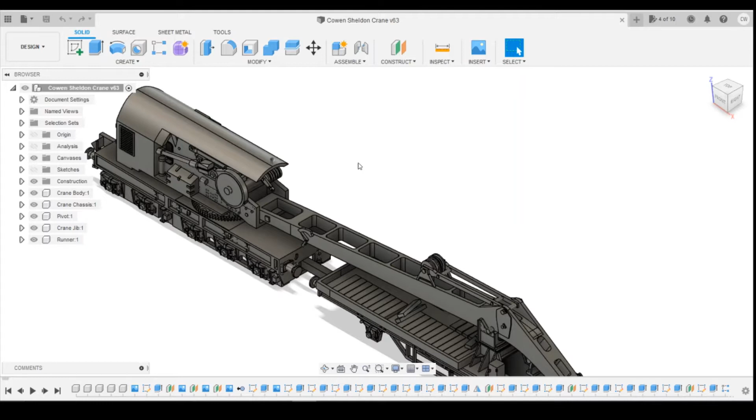In today's lesson we're almost there with the crane now. What I'm going to be doing is just going around and looking for bits of detail that I can improve, some changes that I want to make, just anything that's going to be taking this model that little bit further, that couple extra percentage to looking a little bit nicer. So the video is going to be a little bit bitty, jumping around between different items I see on photos and changes I want to make. Hopefully you can keep up with it, but if you can't, just go back and skip through the video and fix those pieces that you find are different.

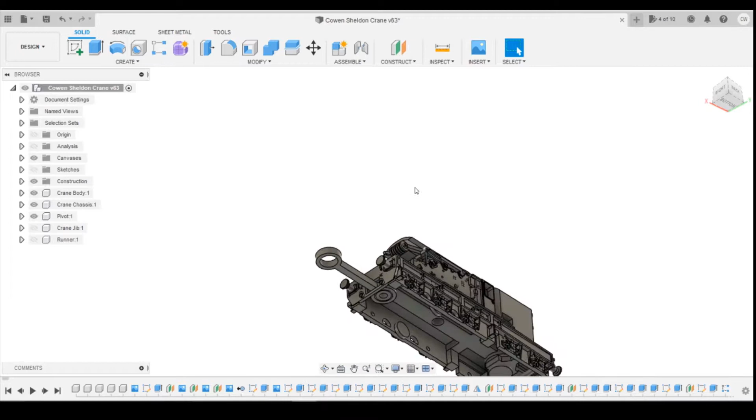Okay, so the first thing I'm going to be fixing is something I spotted when I'd finished the last video, that I needed to make a change to this coupling area. Let's make the runner and the jib disappear here. My intention was to pass this coupling bar through the hole and then over the spindle, but as you can see, the circle at the end is bigger than the hole, so that isn't going to work. I can't make it any wider because I'd lose the detail of the two shackles coming down the side. So the obvious answer is just extruding this bottom piece all the way out, and then you can slide the coupling up and down inside the model.

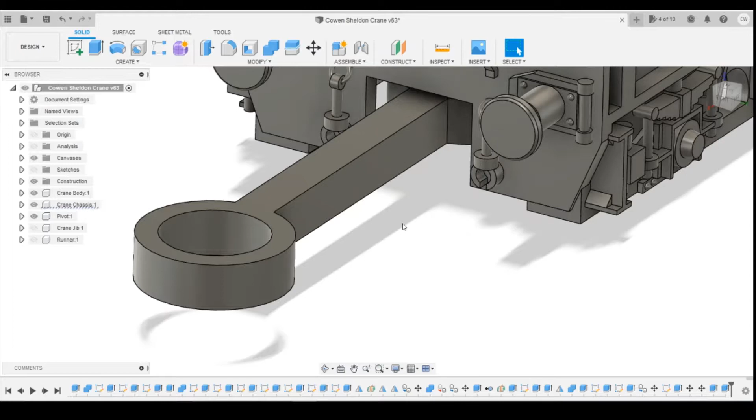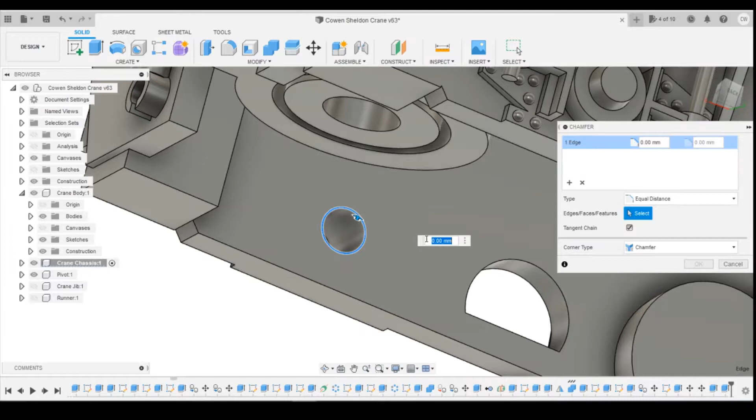Okay, so the next change I wanted to make was in and around the pinpoint holes for the chassis. What I wanted to do was just chamfer off the edge a little bit to make it a little bit more easy for the pinpoint to sit inside it. Let's try 1.2, hopefully that'll work, and that'll give those a little bit more room for the pinpoint to sit in there. I'm just going to take these in 0.2 millimeters.

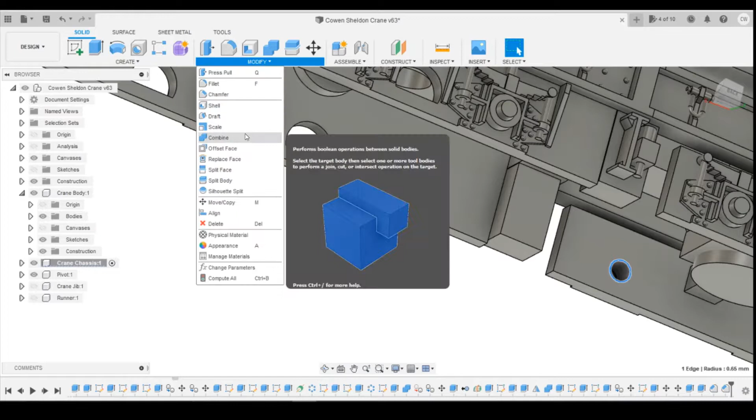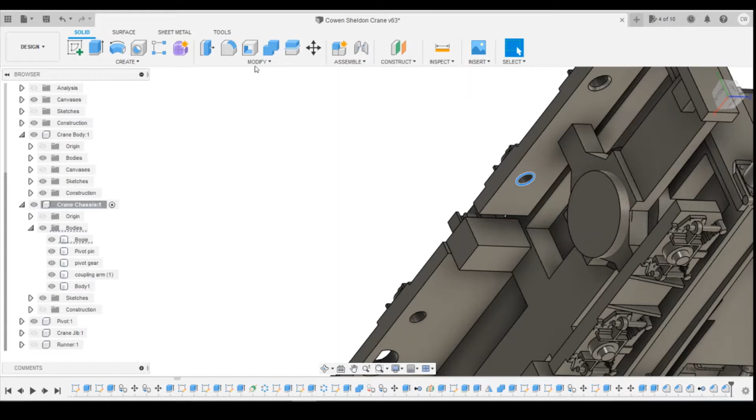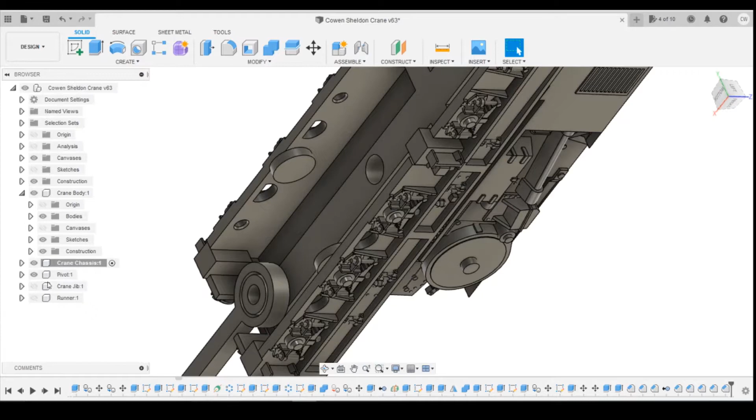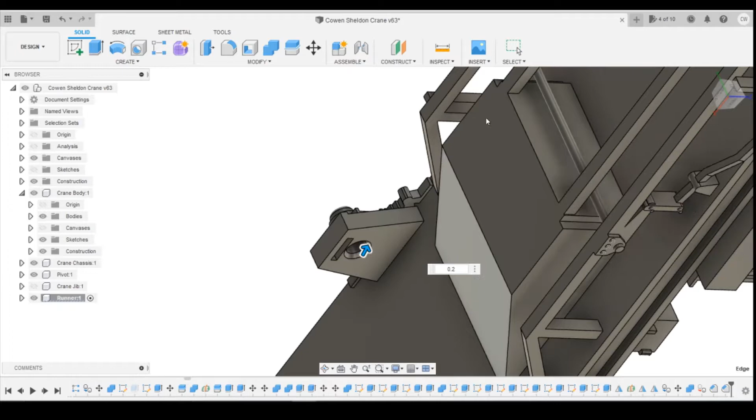Obviously I'm making sure I've got the radio button checked here. Let's get rid of that body here, we don't need that anymore. Okay, so that's chassis done. Let's do the runner next. So selecting that on the radio button, just doing the same thing here. So that's all of the axle boxes chamfered in - it'll give the pinpoint just that little bit more freedom where it comes down at an angle.

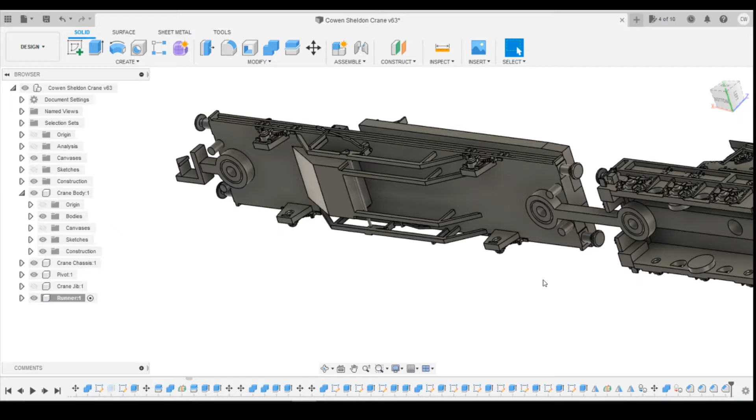Okay, so next thing I'm going to look at is on the roof of the crane here, there's what looks like an exhaust on this side and something similar on the other side. Maybe it's a filler cap or something, but both of them may be exhausts. So I'm going to be looking at drawing those two within the crane body. We'll select that radio button for the body. Okay, so let's have a look - whereabouts is it located? We're going to be using offset planes for this. So that's probably up here somewhere. Just turn the chassis off so it can come underneath.

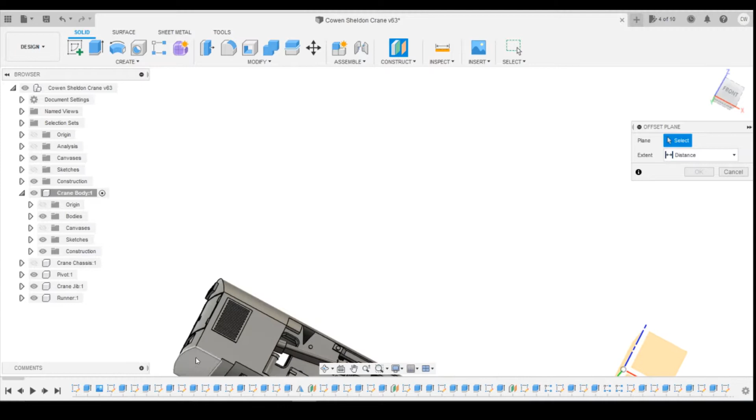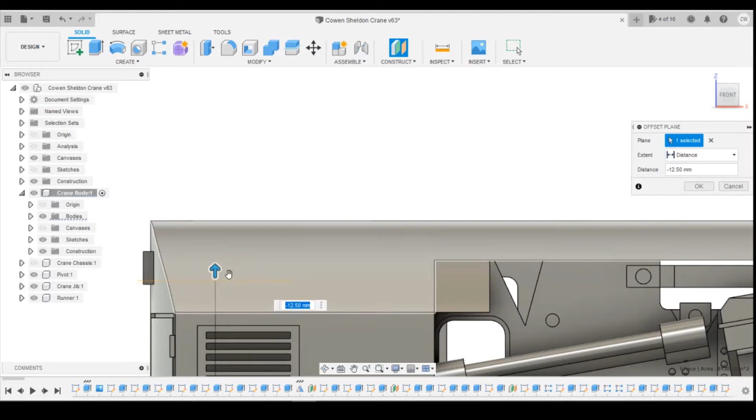We're going to create an offset plane from the bottom surface there. I'm going to bring that up so that it's roughly whereabouts I want it. If you look at the picture, the bottom of this looks like it's below the bottom of the roof line here, so maybe just come down just a fraction - yeah, 12.5 millimeters. And then we're going to draw a sketch on that surface. Let's look at the location relative to this vent - it's pretty much sort of in the middle of it. And the height across the roof, okay, so somewhere in this area here.

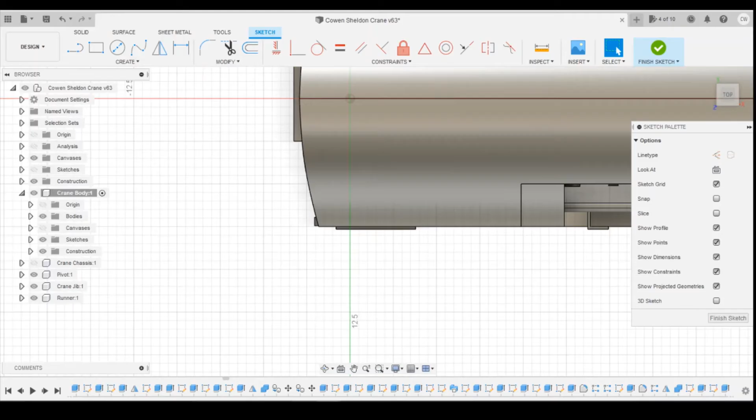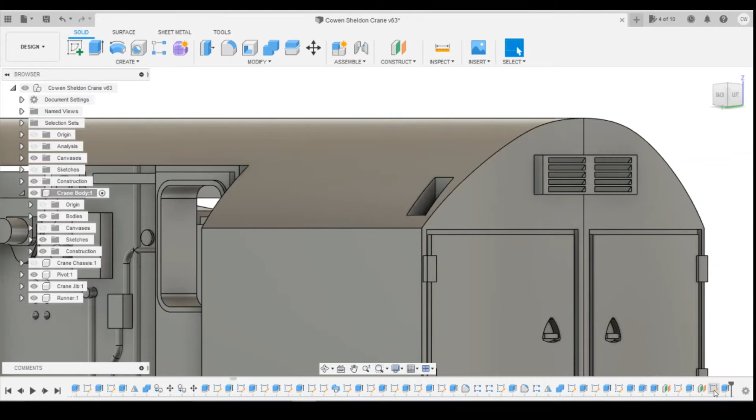So it's going to be using centre point rectangle, I think. Yeah, so maybe going for 1.6 by 2 millimeters. That looks okay as it is there. Let's just define that. 8.25. Too close to do that one - let's try something else.

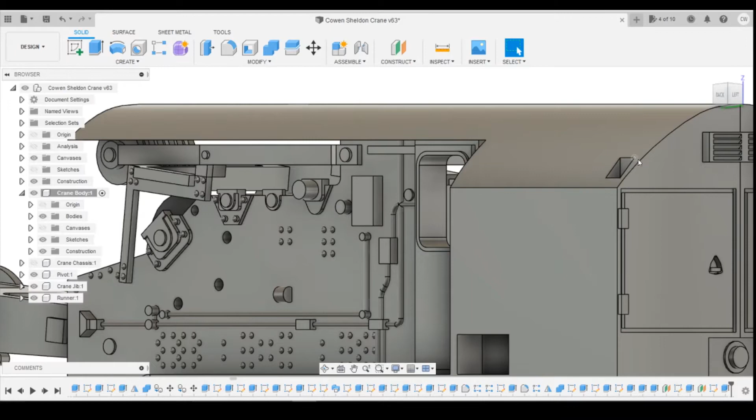And then hover over the top of the square I've just drawn, hold the left mouse button down, it brings up this pop-up. Just scroll down until we get the profile selected, and then right click, extrude, and we can just drag that up. Hopefully that doesn't go all the way through - which it does. So how are we going to fill this in? Well, the obvious answer isn't always the easy one, unfortunately.

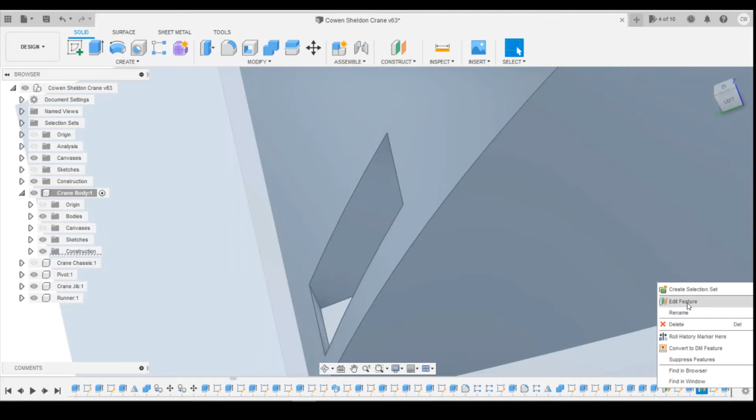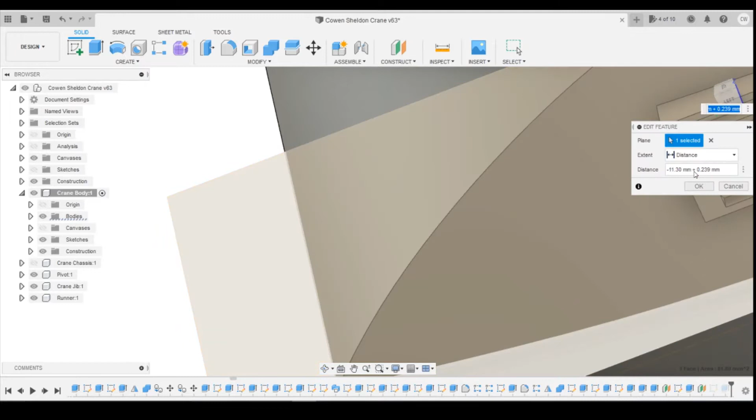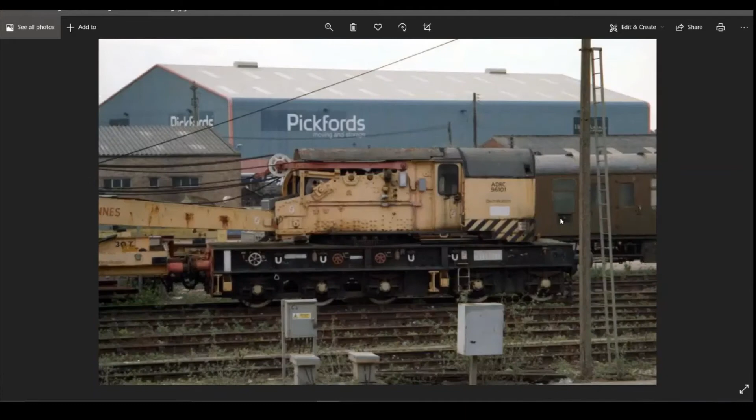Interesting, how am I going to fill that in? First of all, is there that step? Probably going to be flush. So first thing is probably need to bring the offset plane up slightly so it doesn't step down in here. If we look at what that step is, it's 0.239. So if we bring this up, we don't have that step in there now.

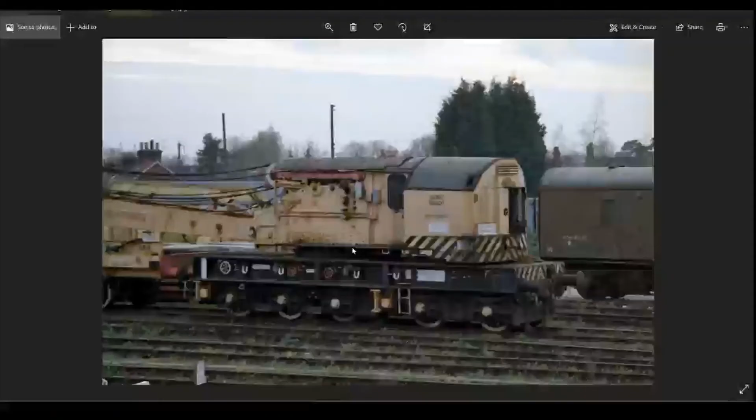Okay, so what I think we're going to have to do is draw a sketch on there. Let's slice that. And we'll draw a rectangle to fill that gap in there. Just drag that back 0.4 millimeters to join. Do the same on all these sides.

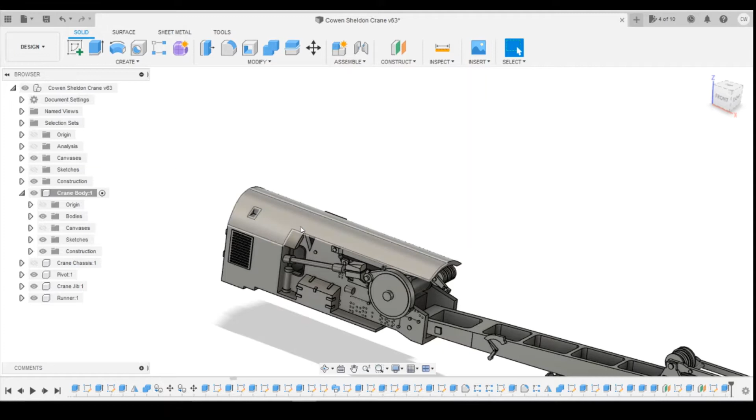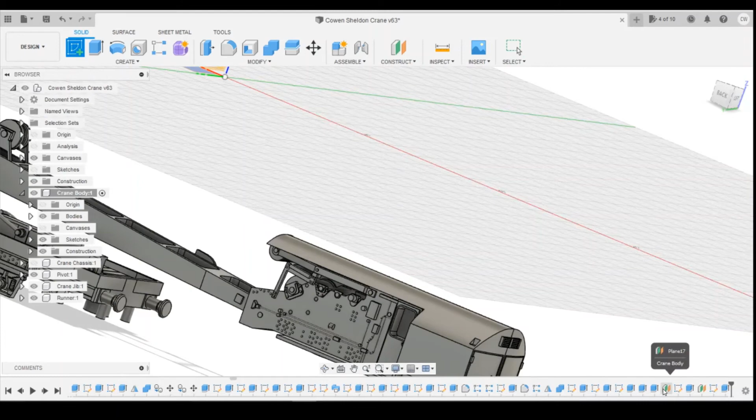This is one of those fixes where unfortunately I don't really think there's an easy fix. You could maybe go back and increase the wall thickness, but actually there is an easier fix. Let's delete those.

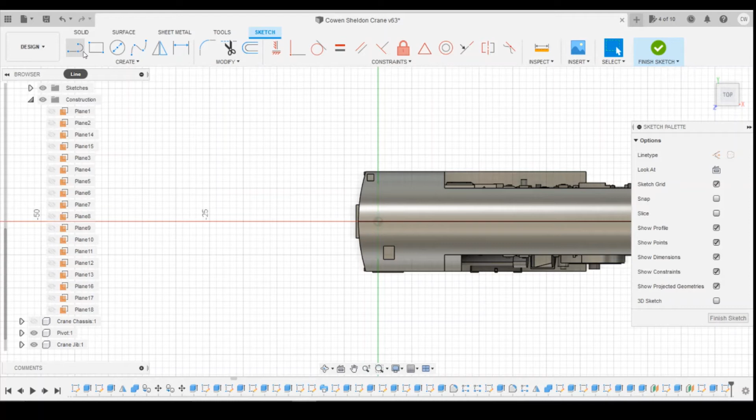Okay, so if we go back in the history, it's going to have to be pretty much to the start of the history for the body. Let's roll back here.

Yeah, there is an easy fix. So we're going to create a sketch on that inside wall, and just do a rectangle. It's going to use a little bit more resin, but it fixes this problem. Do that 1mm.

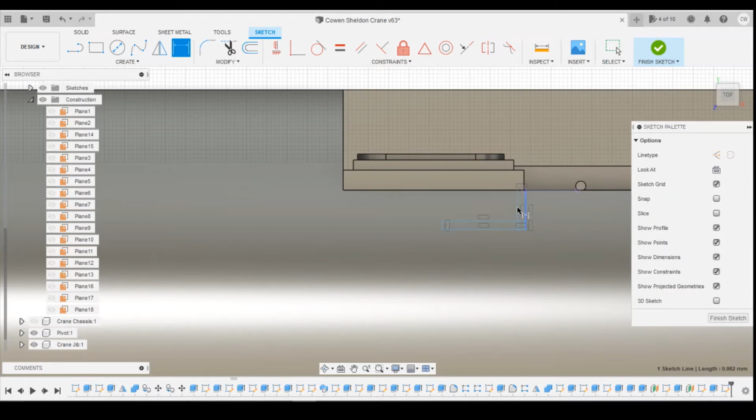If we jump to the end, because we've now got this block on the inside here, where we cut that out, won't have that issue anymore. There we go, so just adding that block has fixed that issue there.

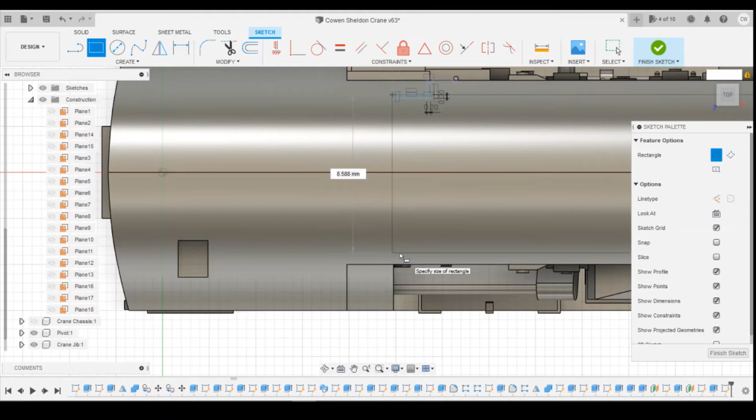So I'm going to look at that, sort of compare it to what we've got here. It looks probably similar, very similar. I'm not going to bother drawing the little screw holes, I don't think they're going to show up on that, so there's no point. Let's jump across to the other side. We've got a similar thing on the other side.

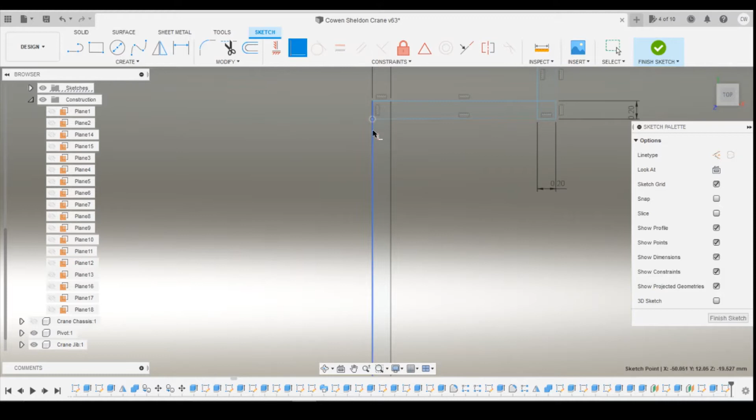So again, we're going to need to create another offset plane for this one. So again, we'll go from that bottom surface. And if we look at the picture here, it's just slightly above where the roof line meets the side of the wagon, side of the crane. So if we just bring this up, and that needs to go slightly above, so maybe 11.3 up.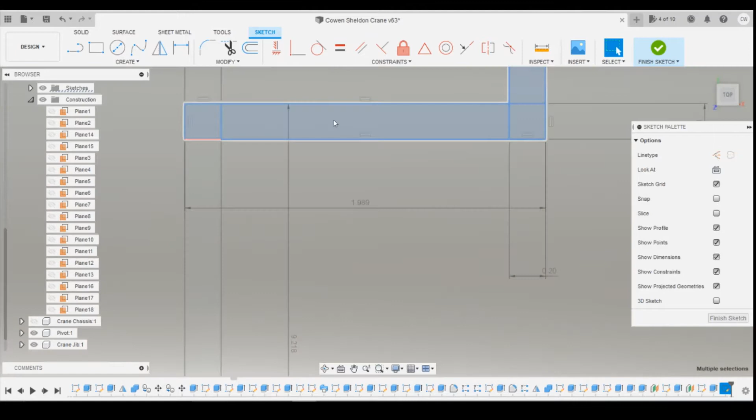And then create a sketch on that surface. Okay, position wise, it's pretty much right in the corner here. So we're going to be looking to draw it in this sort of area here, rectangle. I think something like that, so about 1mm by 1.5mm.

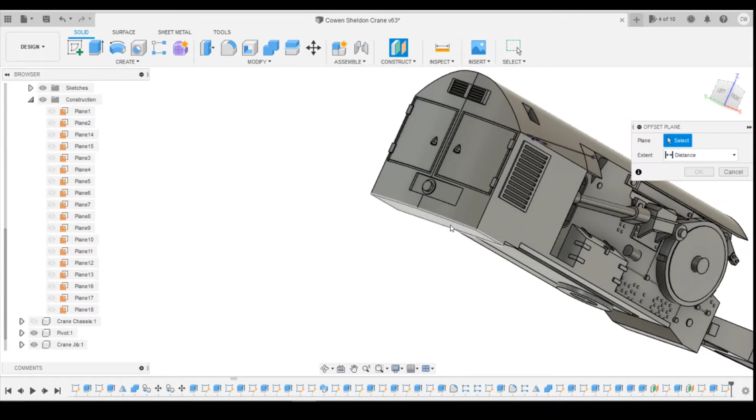0.4. Oh, that's not what I wanted. Okay, let's go to the other end, that should snap easier. Okay, so we're going to go for 1.2mm there. Again, hovering over, holding down the left mouse button until we get the drop up, pick profile, and then extrude this upwards. Hopefully we won't have the same issue here.

We may have to go in and fill in a hole. Nope, we've got that, that's fine. So let's look at that, compare it to this one. How does it look? So it's, you know, pretty similar. The top of that sort of looks level with the vent here.

Okay, let's do that. So it's not, that needs to be a little bit probably shallower. Okay, so if we go back into the sketch history, edit that, I think that we maybe got, keep going to the bottom. Spin that round to the top. Okay, I think maybe 1.5mm here is probably too much. If we go down to 1,

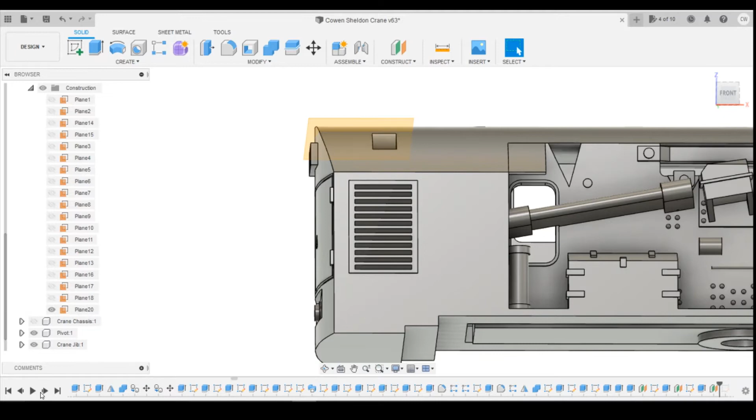There we go. So that looks better. That's almost in the right place. So yeah, much happier with that.

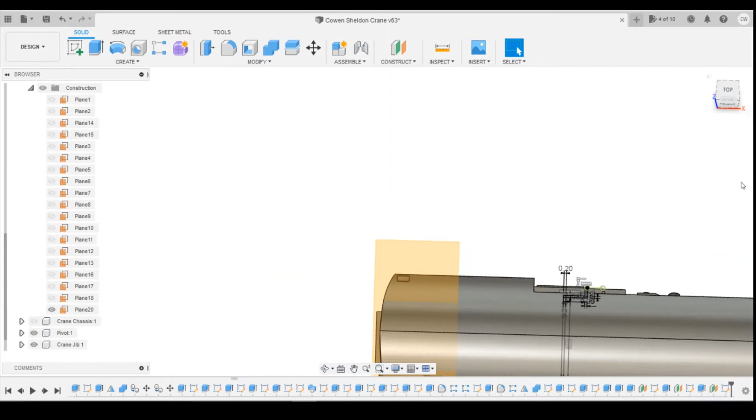So again, we've got this little step down in here. I want to try and get rid of that if I can. If we look at the height here, that's 0.239. So if we lift this up, we just delete that, it says millimeters, but do plus 0.239 millimeters.

What that will do is, why's that gone down? Okay, let's do minus. There we go. And what that's done is that's brought that flush now, so there isn't that little recess into it.

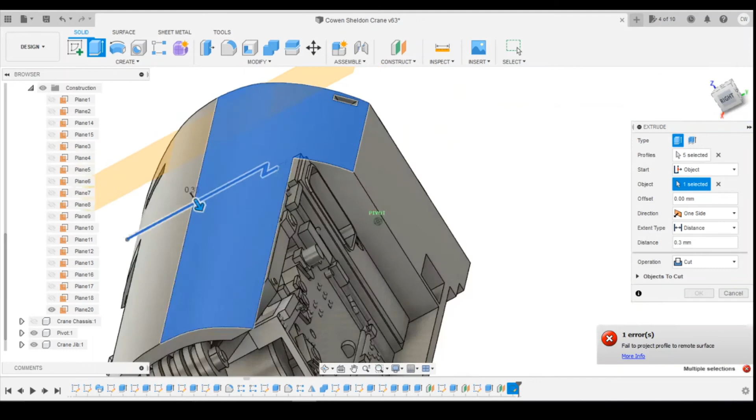Now looking at both of the photos, it's not particularly clear what, if anything, is inside these. If I find a picture that's any clearer, that we can maybe do some detail inside those little holes, but looking at all these photos, I don't think there is a particularly clear of what it is.

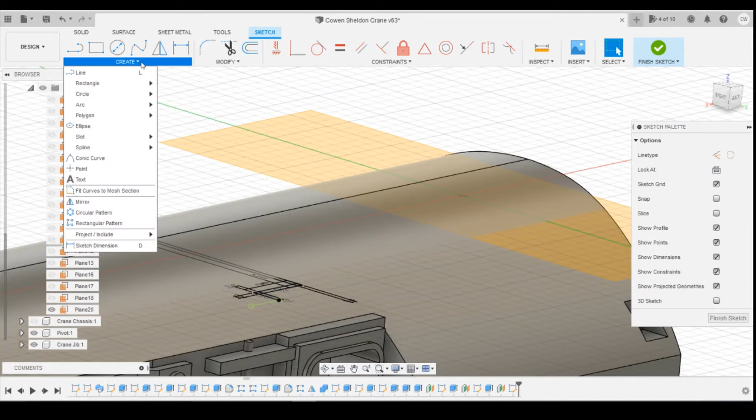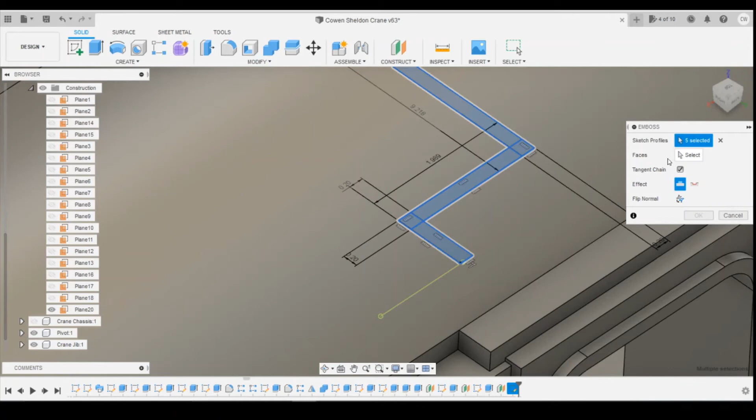So I'm just going to leave them as just two recesses there. If I can find a clearer picture on the internet, then maybe I can go in and change it. There's possibly going to be a hole that the exhaust comes out of, but for now I'm just going to leave those like that and continue looking for detailed changes we could make.

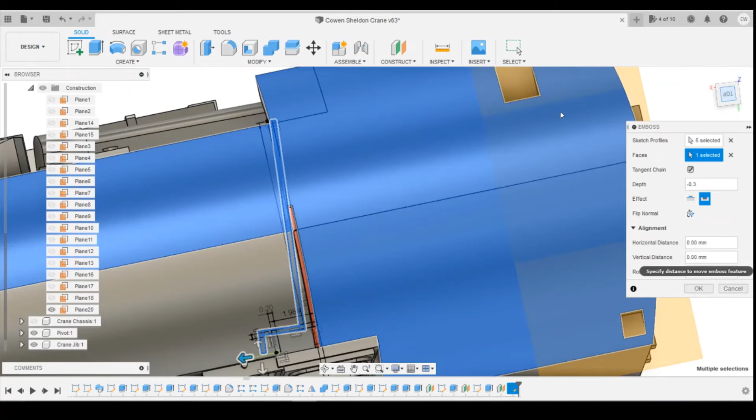Okay, so the next thing I'm going to add detail-wise is there's a seam on the top of the roof here. There's a little cutout and then it goes all the way across. I've looked at photos, I can't show them because they're not Paul's photos to share, but this line goes straight all the way across other than this little cutout here on the top.

So if we jump back into Fusion, to be able to draw that on this surface, we need to have an offset plane that's within the surface.

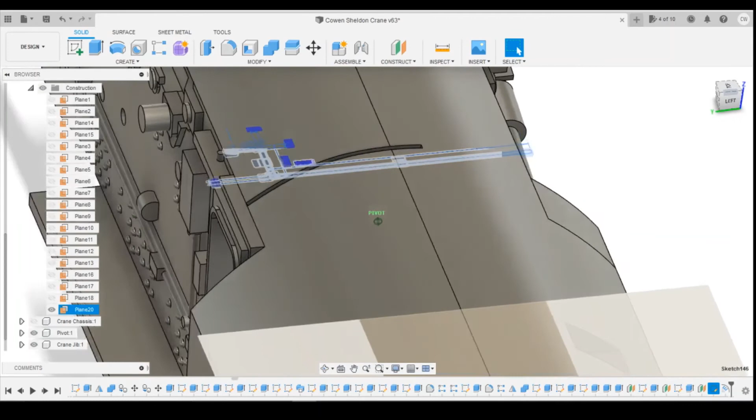Okay, if we spin this round, we know we've already got offset planes that are within the surface because we picked them for drawing these two holes here. So if we just draw on plane 17, construction there, draw that plane.

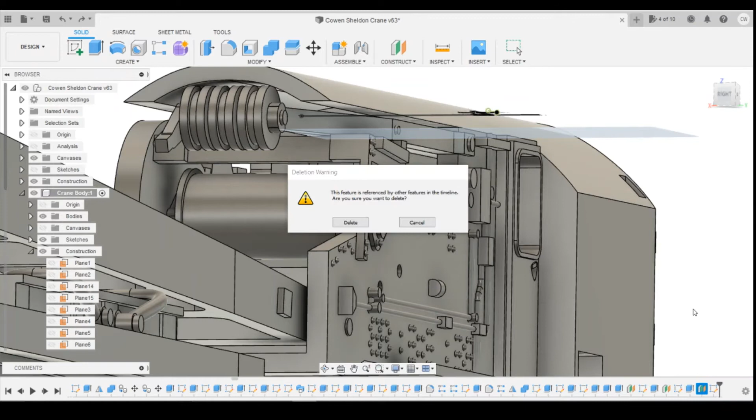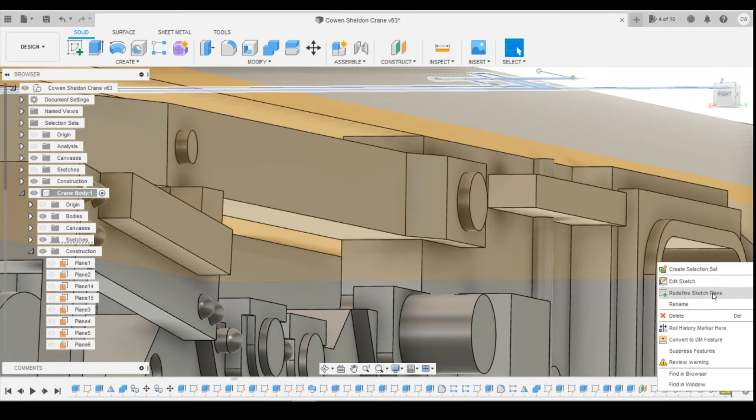Okay, if we look at the cutout, it's just in front of where the door line is. The door line's here, so it comes out and across. So if we draw a small rectangle like this, and I'm going to coincide that to that line there. And then draw another rectangle from that corner, and it comes about halfway down the door.

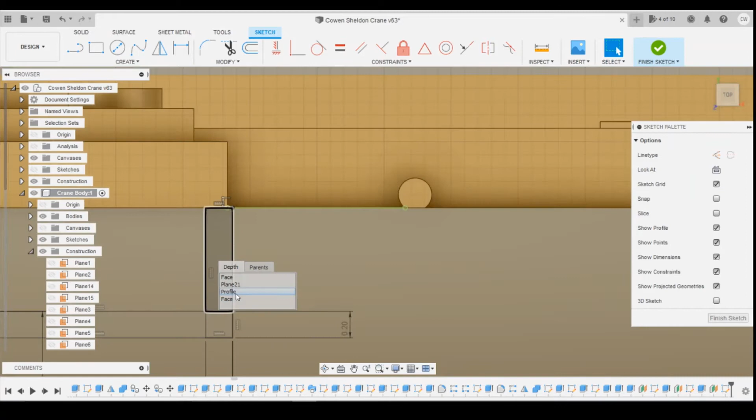Like that. Let's define these widths actually. So the width there, 0.2, and the width there, 0.2.

Take this one all the way across. It won't snap to the roof line there. But if I just change the width there to 0.2 and then coincide to the edge.

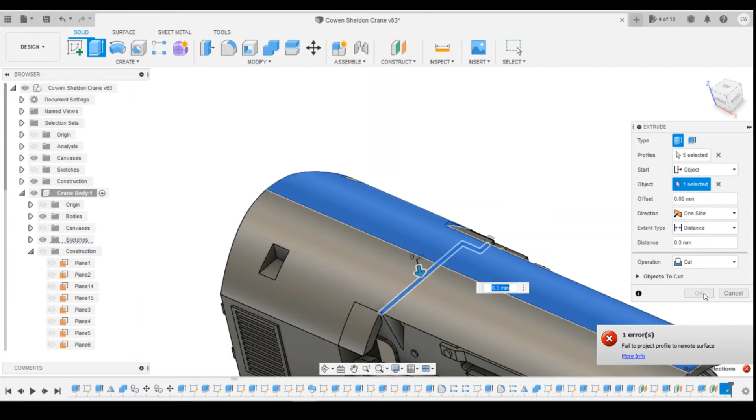Coincide that to the line, which it already is. Define the length there, the distance across there.

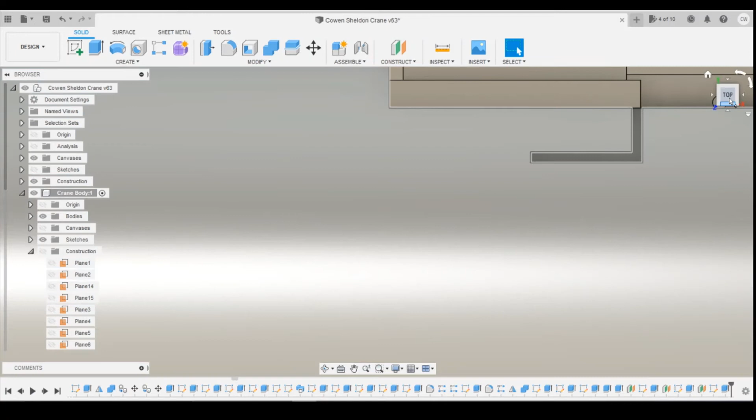So I'm just going to select these profiles now, holding down the Shift button and then holding down the left mouse button to get a pop-up. Okay, right click, extrude.

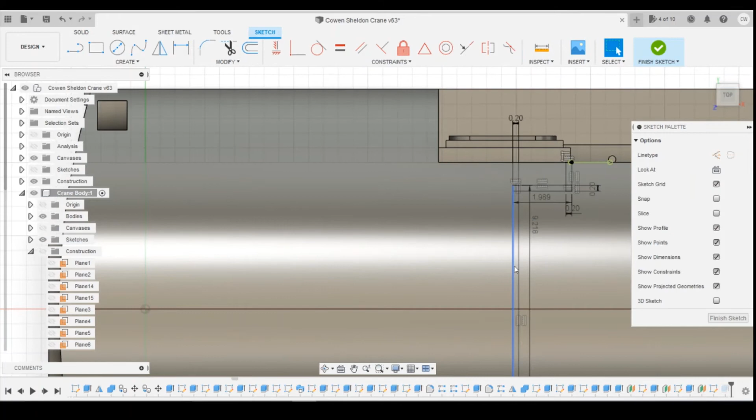And I'm going to start from object, which will be the roof surface, and then I'm offsetting it inwards 0.2. Cut - it won't do it, because some of it's not inside. Yes, that's exactly what it is.

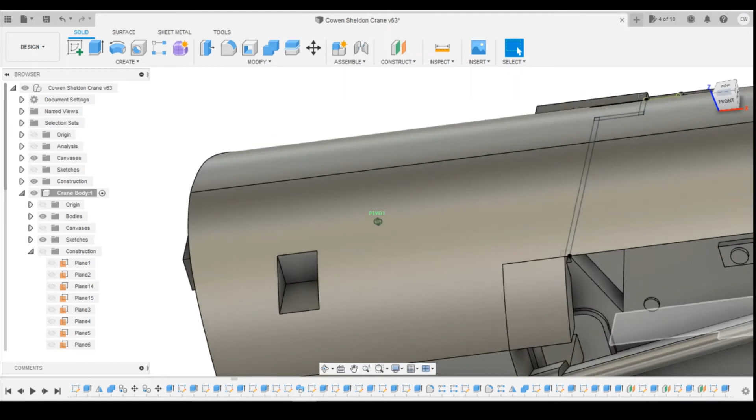Okay, so I'm going to redefine a plane then. I'm going to have to draw a new plane. Finish that sketch. Construct an offset plane.

So minus 14.5, that's going to be plane 19. If I right click on the sketch I've done, redefine sketch plane, cancel that. I'm going to drag the plane back before the sketch because otherwise it doesn't exist technically.

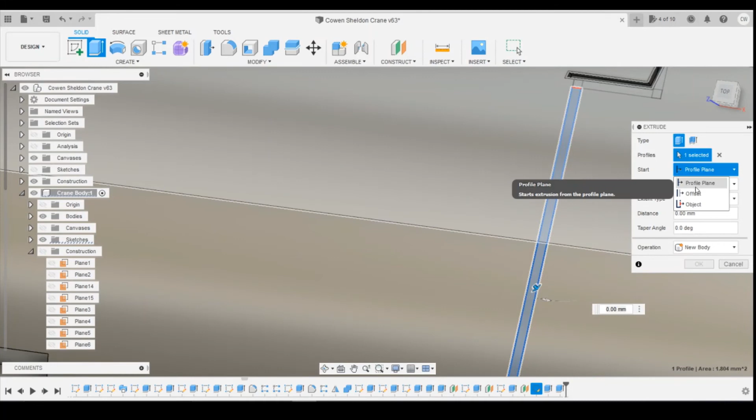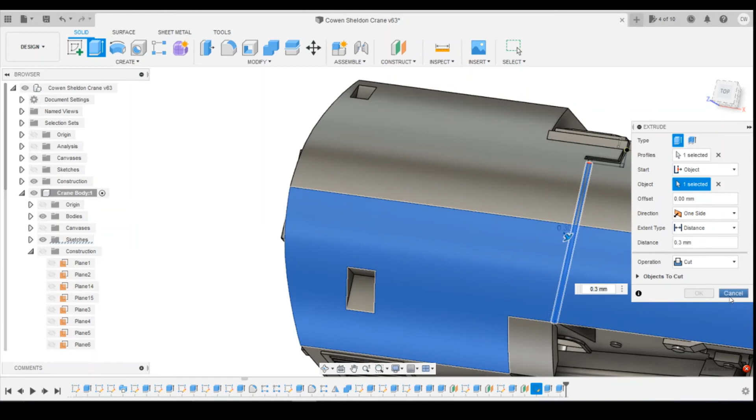That's gone a bit funny for some reason, so I'm just going to undo that. I'm going to want to compute again, and delete that offset plane and create a new one.

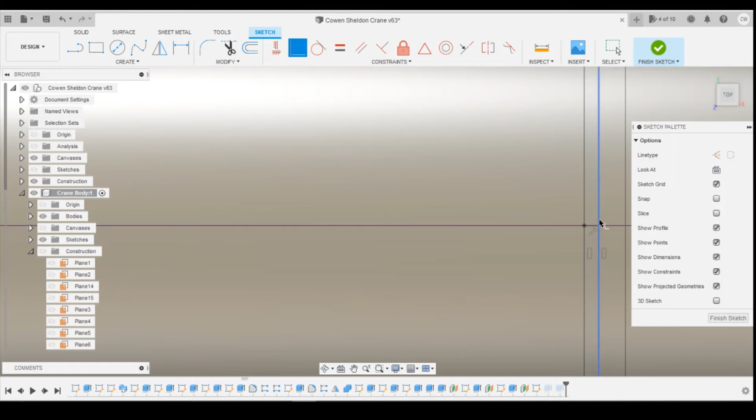So I'm going to roll the sketch history back before that drawing first of all, and then add this in. So it's minus 14.5. We'll roll the sketch history forwards. Okay, and then right click, redefine sketch plane, pick - it's now plane 20, click OK.

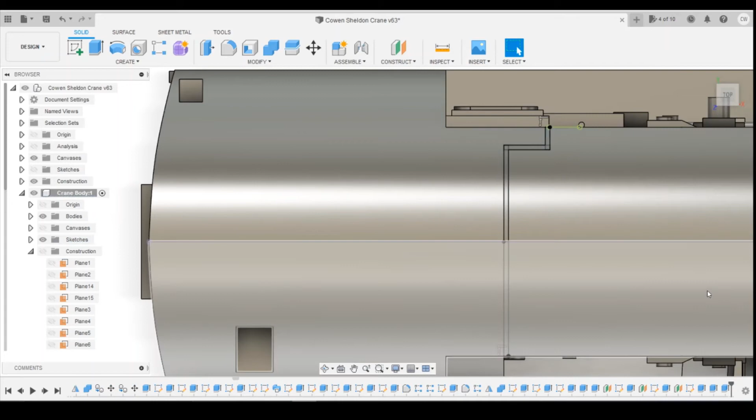Hopefully that's going to work now. So now edit the sketch, I can go into it, select these profiles, right click, extrude. From object, select the roof, plus 0.3.

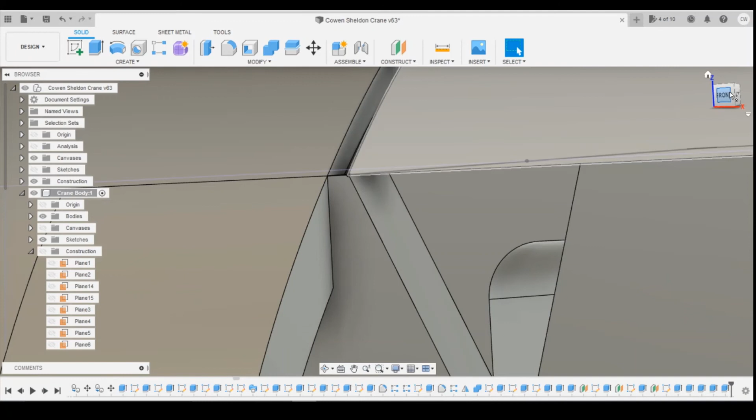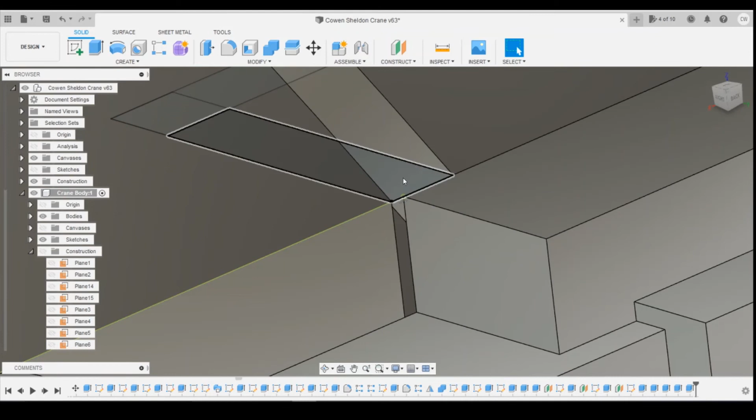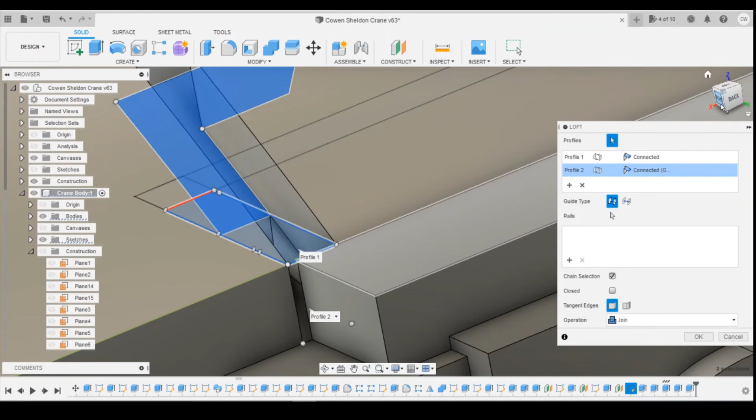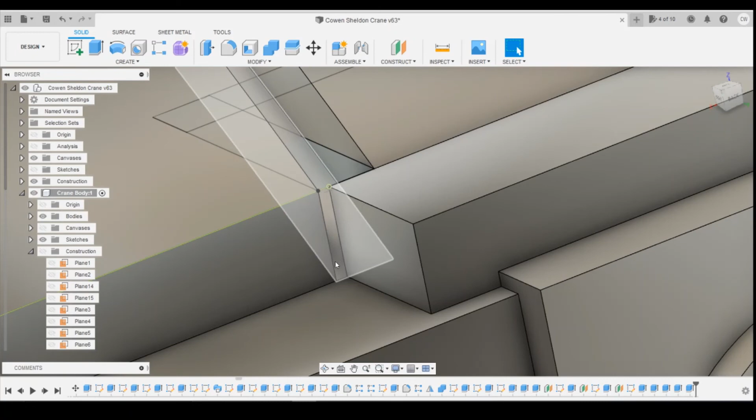Cut - that's not going to work either. Let's see if it will loft. So the loft has gone some of the way across, but not all of it.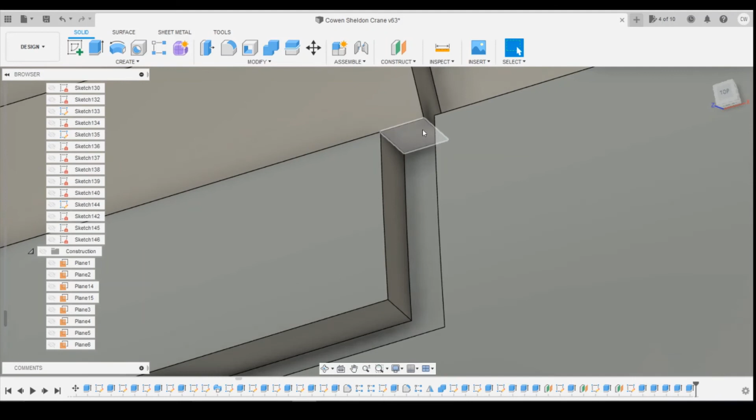Okay, so I'm going to try something else. I'm going to, if we delete that construction plane, which will throw up an error in the thing there, which is come back one.

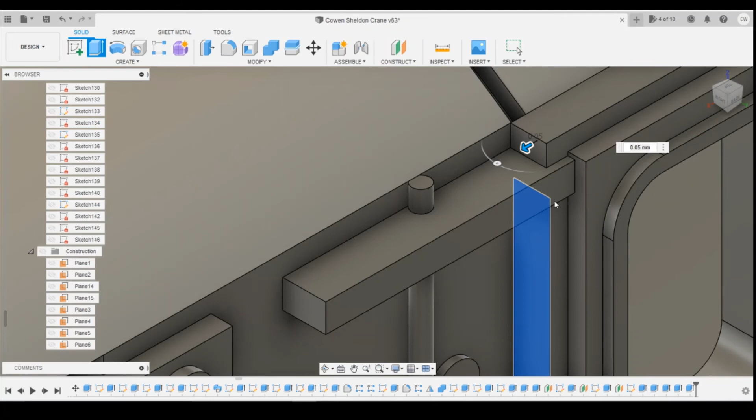It's going to create a construction plane off of that surface there. And then I'm going to define the construction plane now to that one, because that's pretty much the bottom of the roof.

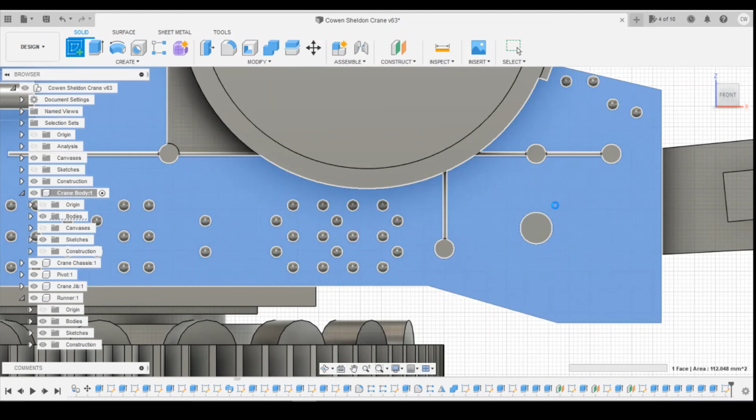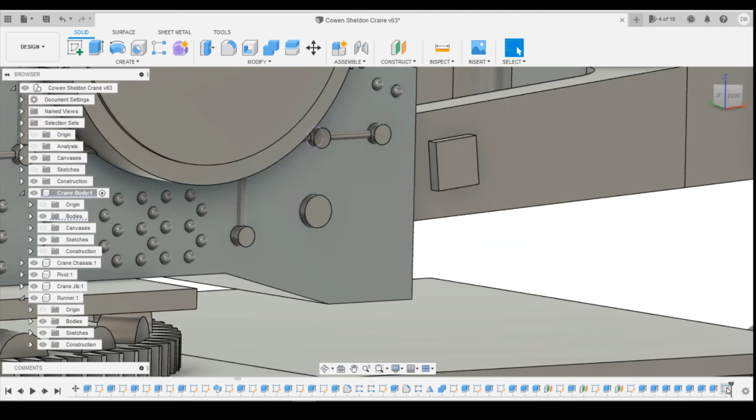Sketch. Let's try selecting these again. Can I do it? Could be I need to complete these two. Okay, let's try removing.

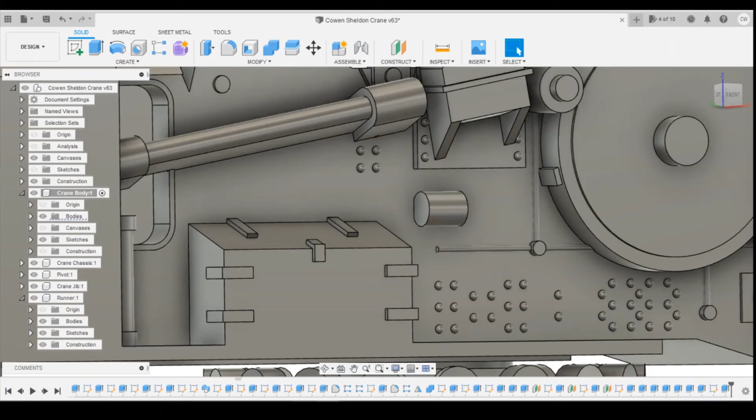Profile, see if it'll cut now. Yes, it will. Okay, so it must be something to do with this profile going across both planes, both parts of the roof here, which is fine because we'll just keep trying it a different way.

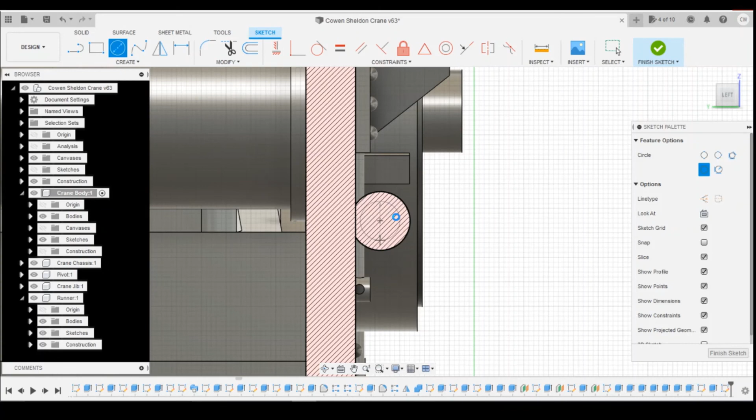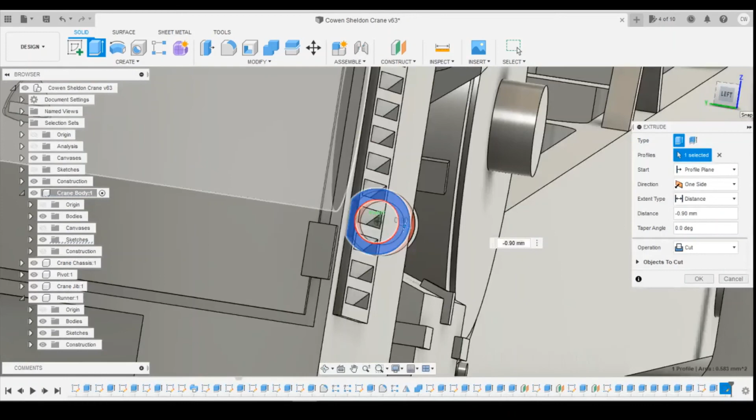Let's try that again. It's playing up.

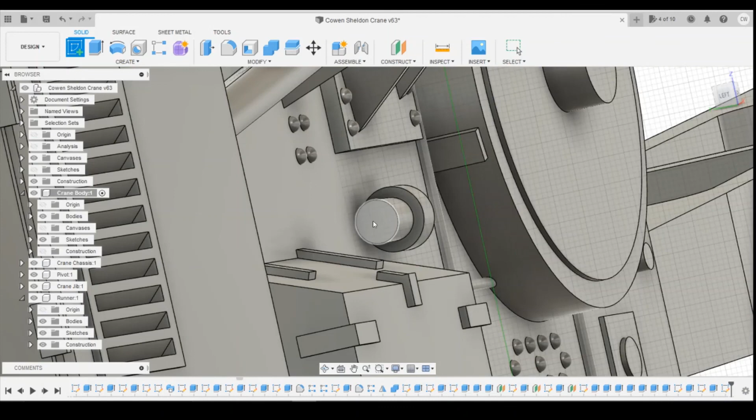Profile, right click, extrude from object, select the roof, down, cut.

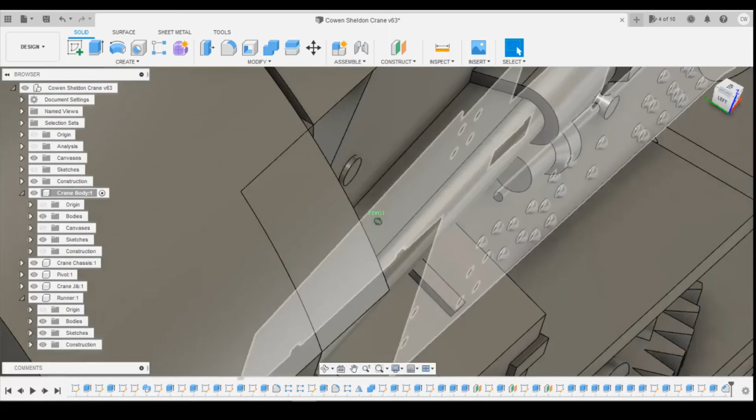Doesn't like it. Okay, what if we select that plane? Doesn't like it. So it's got to be something to do with going across the profile. So if we edit sketch, project, see if it will, and then we draw a line across.

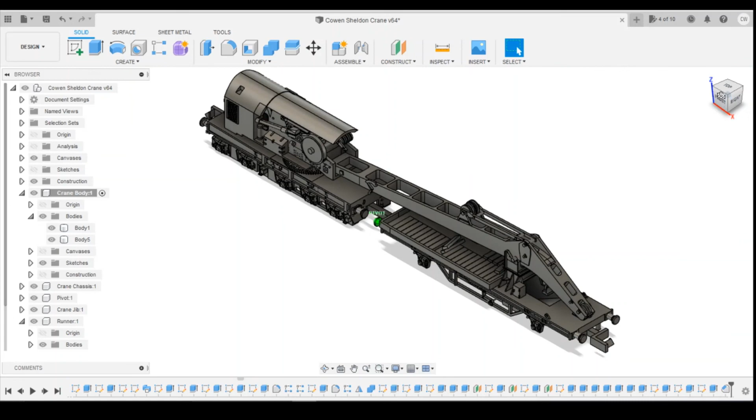That coincidence to that line there. That should split this into two parts. Select that profile, extrude from object, select that, cut.

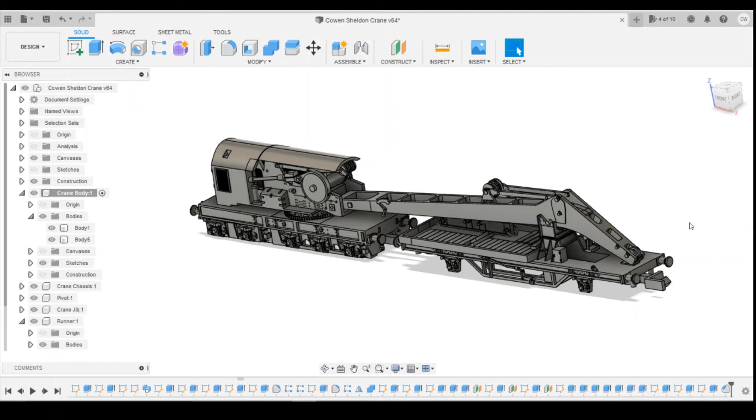Okay, so that's worked. Do this profile, extrude from object, cut from there, 0.3. Get there in the end.

Why have we still got this cut here? Could be because it's coming round. Yeah, it's fine. So I'll extrude that bit there to that surface, fills that hole in. Is it cutting the other side at all? No, that side looks okay.

Filling something here. Yeah, I think we probably do. If we right click and loft that profile to that face, tell it to join, hopefully that will fill in that gap. Not.